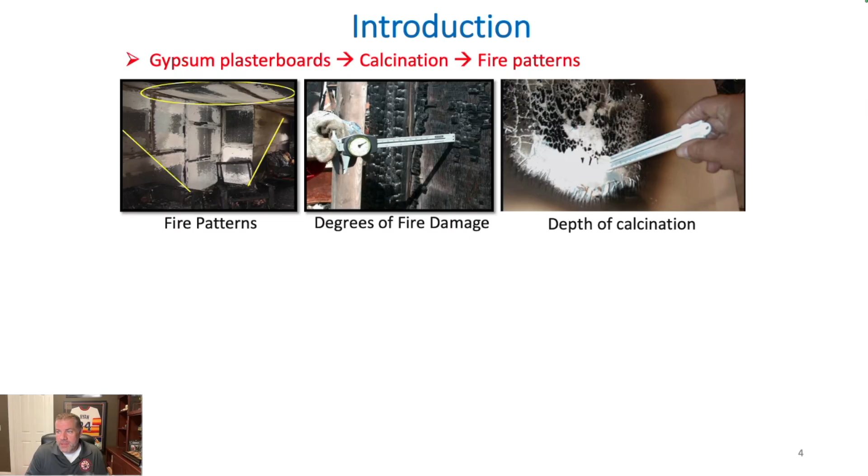But really what we were trying to tie together is: is there a way from the forensic side, the data that we gather through depth measurements, to tie that back into the fire dynamics? And the better we understand that, the better we'll understand the fire investigation. So it's a big cycle is kind of what we were focused on.

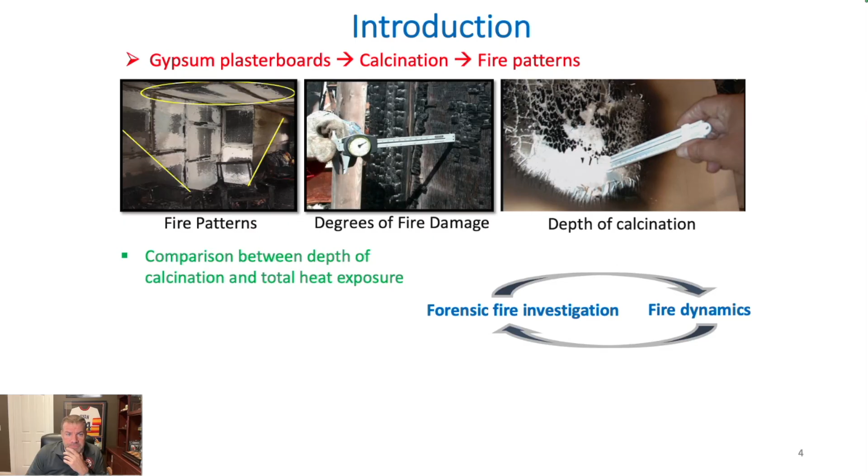The objectives basically, we want to analyze gypsum calcination, or drywall, the depth measurements in drywall, and then can we predict that? There's a lot of challenges with that. If you just assume it's regular drywall, just by itself, there's a lot of challenges because we don't know from a chemistry standpoint exactly how that dehydration front is going through the drywall.

So let me back up. So when I talk about drywall, gypsum wallboard, I assume it doesn't translate, but it's kind of the same words you guys use over there. It's a predominant lining material that we run into in the United States. I used AI for this, but it also said, and you guys can correct me, is Australia and New Zealand in that area, you guys use a lot of drywall as well for your lining materials?

We call it... I had a blank, but we've got a brand name. We call it a brand name rather than drywall. Plasterboard. Okay, so like Gyprock. Gyprock. Yeah, Gyprock, okay. Yeah. So there you go, plasterboard. Thank you.

So that's kind of the same stuff that we see in most of our structures over here. Now we'll get into, we have block walls and stuff and reinforced concrete, but a lot of our, especially residential, and a lot of our commercial structures will still have drywall. So we run into drywall a lot, or gyprock a lot, in our structure fires. So we wanted to kind of focus on that.

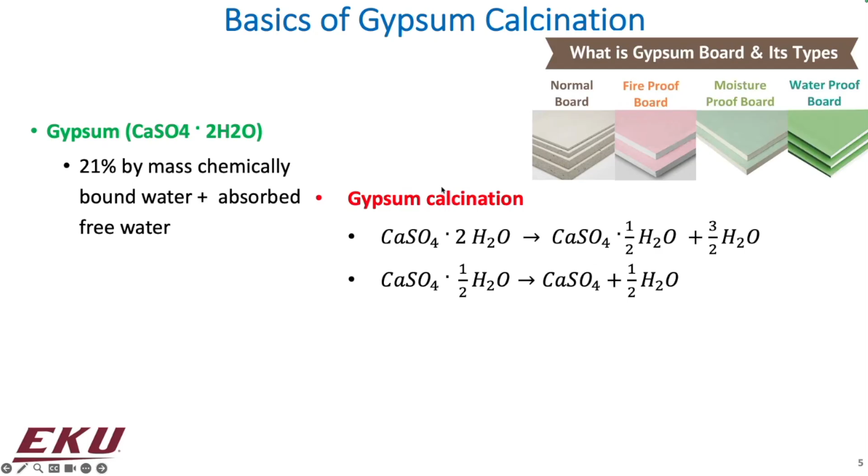So I'll get into the basics. We focused our initial investigation, so we'll call it phase one, on just your normal gypsum wallboard, not lightweight, not anything different, just kind of a homogeneous mixture of gypsum drywall that we would normally run into here in the States. And then the second half you'll see I'll talk about is basically the other side of that. So we looked at fireproof, water or moisture-proof board, sound resistant, those types of gypsum wallboard, and lightweight, where you have just basically pockets of air throughout.

And we wanted to see, first, just regular drywall, or gyprock, how's that affected? And then secondly, the last two years we've been focused on, well, can we see a similarity in these other types of drywall? So just to back up, gyprock is essentially 21% by mass chemically bound water. This is your normal gypsum wallboard. You also have some absorbed free water just from your humidity and moisture in the air anyway.

So the way gypsum calcination works is you have this calcium sulfate dihydrate, so that's where your chemically bound water comes in. As you heat it, you essentially have to chemically dehydrate the wallboard, or the gyprock, before you really start affecting the material itself. So we're going to look at some of the chemistry. That's about as deep as we'll go here.

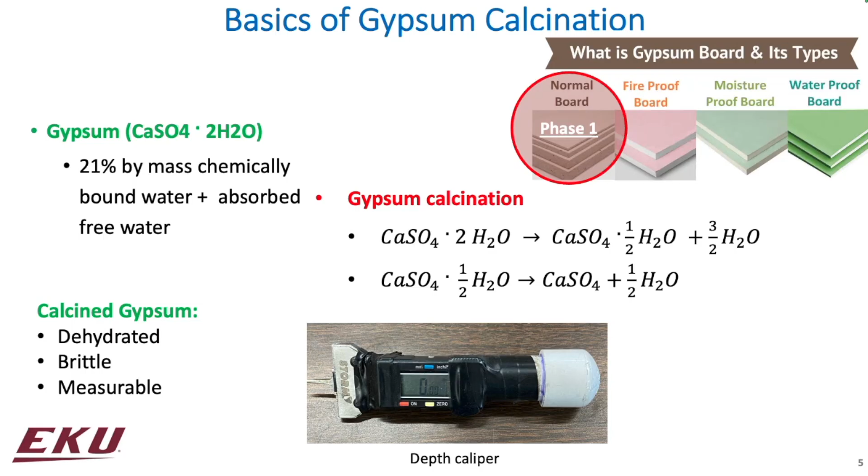As the fire's heating the wall, we're dehydrating it, and by that dehydration, we're leaving kind of this crumbly material behind, in which fire investigators, we can measure that. And what we're looking at is: is it reliable as a measurement for us?

So the original work, at least in the United States, was by a group. It was a husband-wife team. She was an electrical engineer, he was a fire investigator. And they were the first ones to kind of publish anything about this potential of being able to look at gyprock, and through the heating, can we measurably determine what's going on.

They initially did cross sections, so they would cut the board and then look for bands of different color. But it's hard enough to have fire investigators poke sticks into the wall. Trying to have them cut little sections of drywall throughout the whole scene isn't feasible, just from the time aspect alone.

So after the 1980s, they moved towards asking: can we insert a probe and get a depth measurement that gives us that similar context as what they were getting with the changes in color?

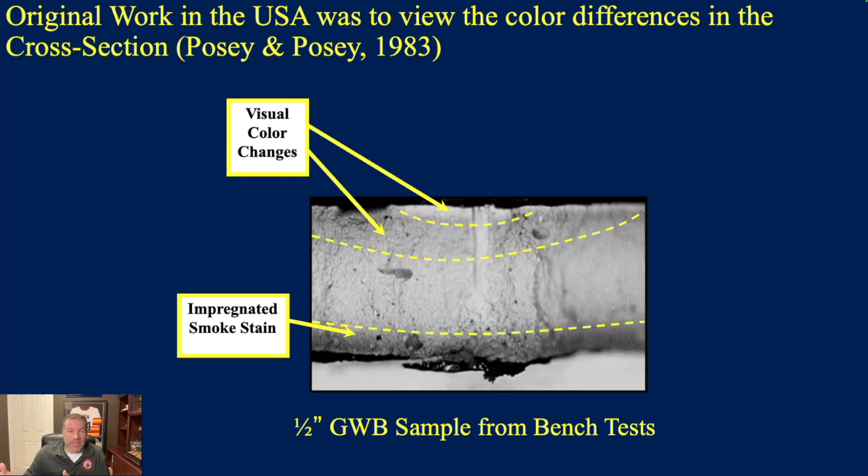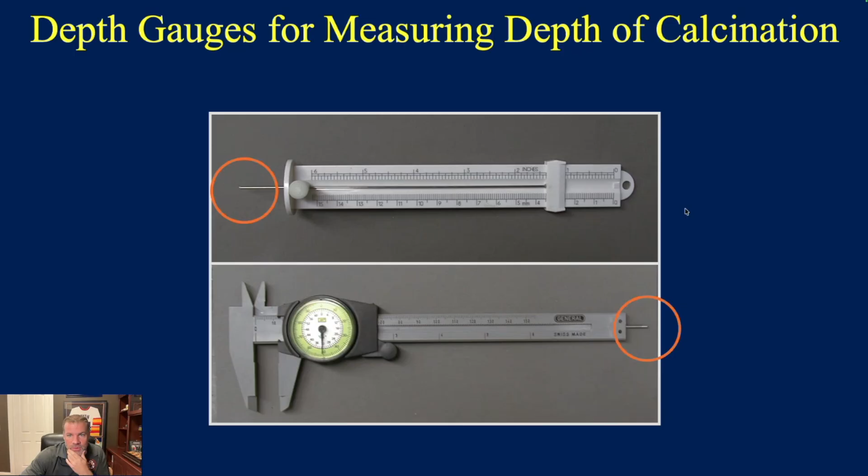We moved to this tool because we wanted more reliability. The original tool really depended on who was pressing and what kind of force was behind it. If you've got Bubba over here who can bench 400 pounds, is he pushing way harder than somebody else? So we tried to figure out if there was a better, reliable measuring device, and we came up with a whole bunch of them. You'll see a couple pictures later where nothing really worked.

We wanted a constant spring to take the user out of the pressure aspect of it. Jamie Novak, a fire marshal in Minnesota, came up with this idea. He basically takes a PVC tube, your digital probe—you can use tire probes or a general caliper—and then just a spring behind that.

I have this in a PDF document. Sadly, Jamie Novak has passed away, but he showed me how he built these a long time ago and was always okay with me sharing that, so I can share it with you guys. It's broken down picture by picture, and it's pretty simple construction, but the purpose was to keep this a reliable measurement regardless of who's doing it.

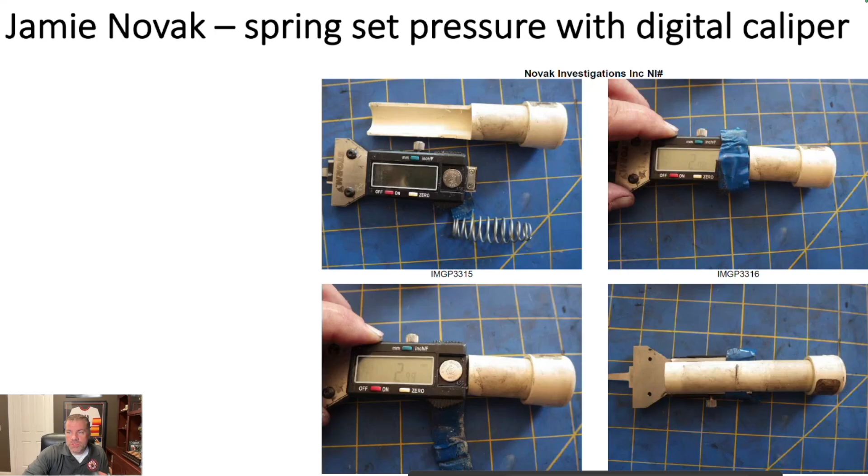From a fire investigation standpoint, this might be review for most of you, just how we do it here in the States. You're pressing into the drywall, either with the digital probe I just showed you or the original blunt probe, by hand.

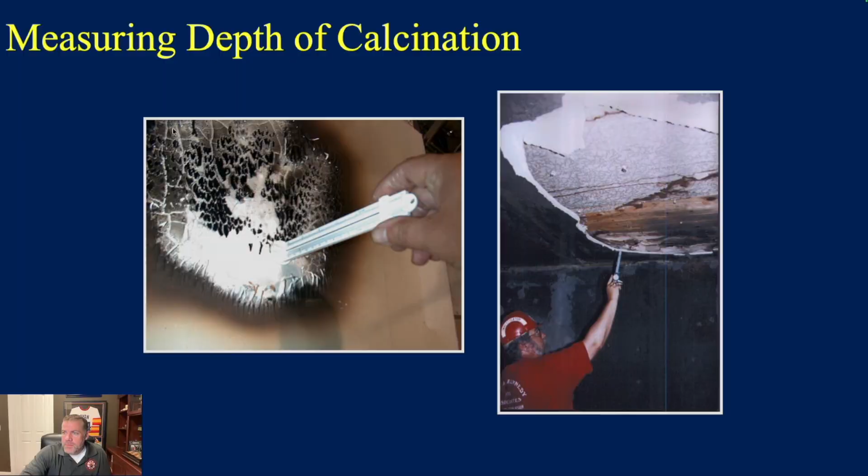We typically grid the walls so we have a uniform measurement system across the wall surface. We'll mark the score of the wall with some tool, then come through with chalk lines and pop them, which gives us a visible grid. We measure wherever those grid lines cross, but that's a pretty labor intensive process—just chalking that many lines takes some time.

So often, especially if I'm on a scene by myself without an extra set of hands, I'll just take the surveyor's tape, the pocket rods that pull all the way out to like 6.5 feet—I'm assuming you guys have that as well—hang those off the wall as my vertical grid, then lay a tape measure for my horizontal grid, and go foot by foot.

Nobody's done the true measurement study on whether we need a 6 inch by 6 inch grid or a foot by a foot one. How refined does that grid or mesh need to be? Nobody's done that work yet, but one foot by one foot, about 0.3 meter by 0.3 meter, has been adequate for what we've seen so far.

We establish a grid essentially just to make sure that we're measuring in similar locations throughout the space so we can have an idea of what's going on.

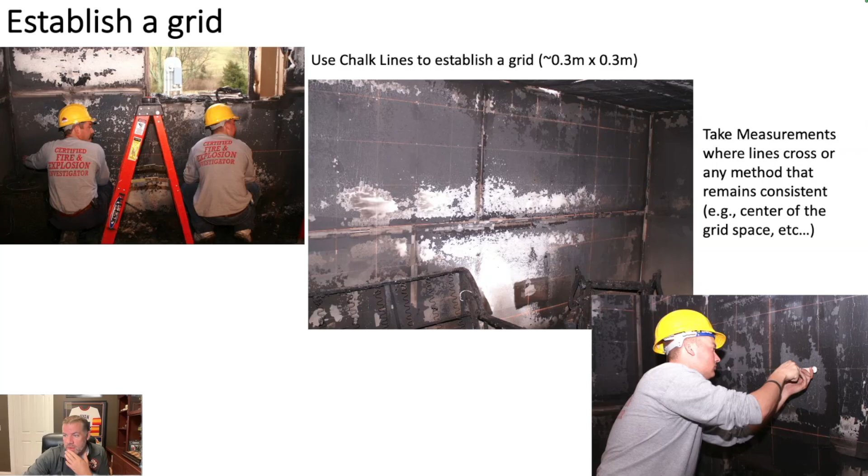Where we found depth of calcination being very helpful is if the whole wall is black or the whole wall is white, because we can't see from a visible standpoint any differences, but measurably there are some differences, and I think that's where fire investigations can really benefit from this.

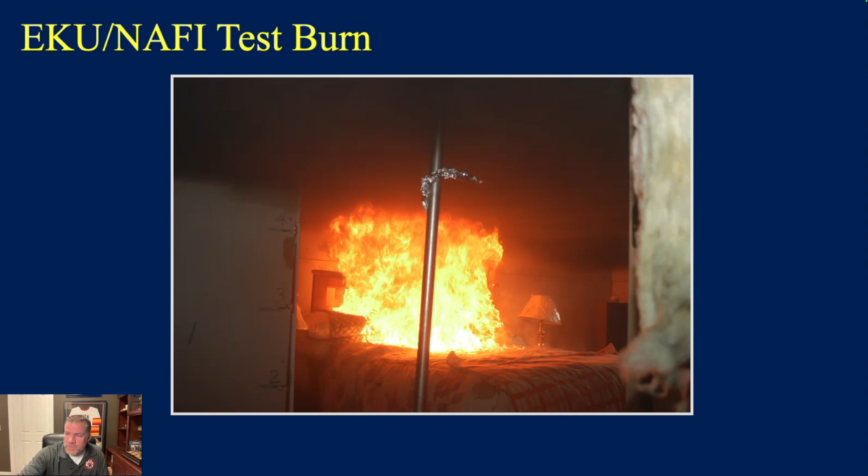So we've been doing tests. I've been doing fire tests ever before I got to EKU. So for the last 20 years, I've been involved in doing fire patterns tests, and this is one of our early on tests. We started the fire in the center of the bed, and then we were looking at the damage afterwards. Obviously, you have your clean burn, so it's pretty simple to see what's going on here.

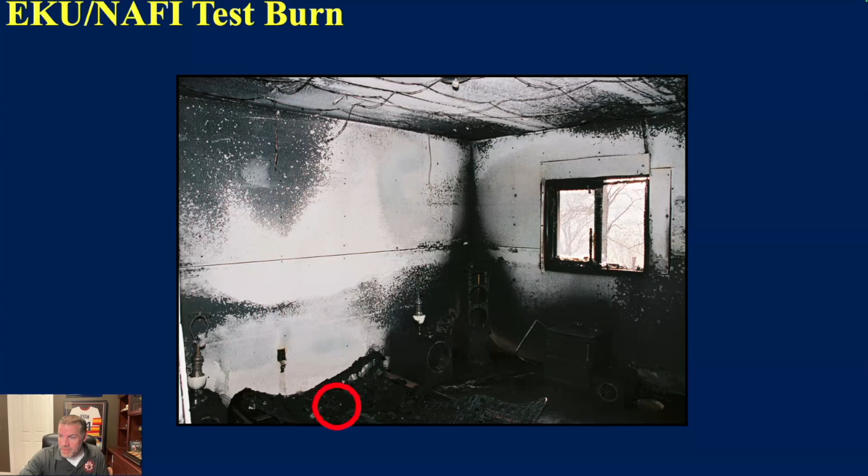But then what we did is we measured it, or we gridded it off, and then we measured it. And this is how we would, back in the day, display it for everybody else to follow along.

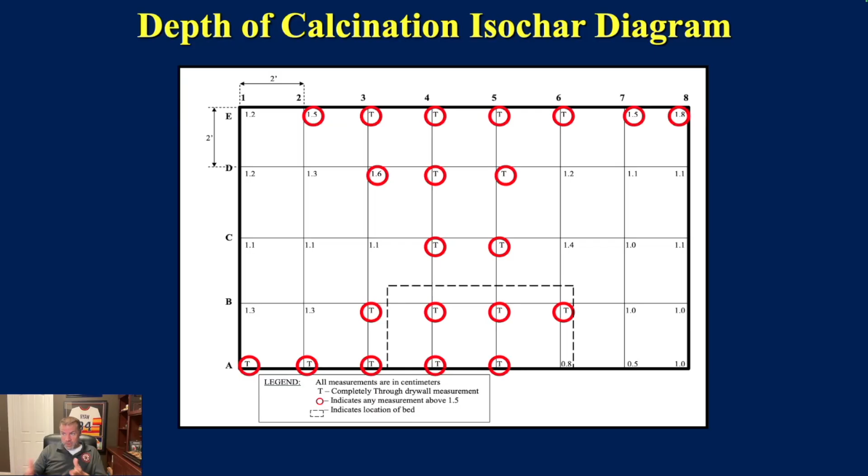Now, what I have been doing is using Excel, or I use MATLAB quite often because it's just a matrix of numbers, just to help give us a contour plot, which looks a little bit nicer. So I'll walk you through that here in a second.

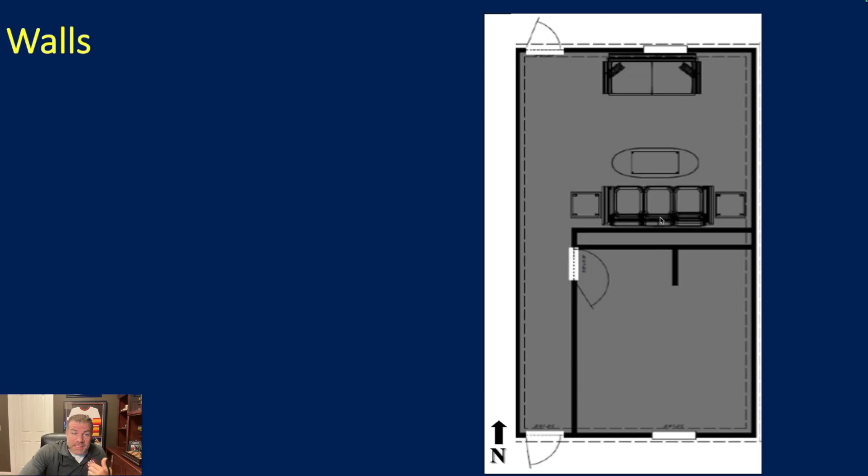But what I want to show you now is we did a series of tests. So we've been doing tests for a long time is what I'm getting at. And we've been taking depth measurements for a long time too.

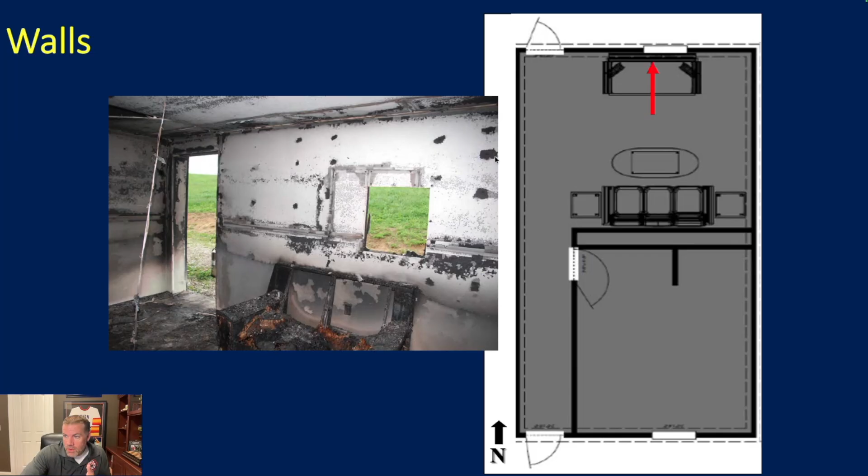So for instance, this would be to me an example of where doing depth measurements are helpful. We performed this fire test. We have a love seat underneath the window, and you have a door as ventilation. You can see the wall damage here. It's pretty much all high, right? Nothing surprising there, I don't think an origin's over there.

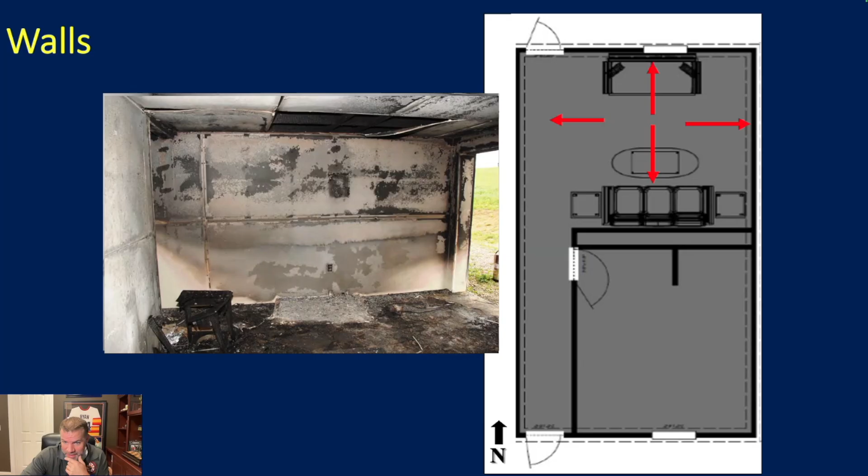But when we take the actual measurements and we display it—here, what I've done is they call that an exploded view diagram. So basically you've taken your two-dimensional floor plan and you just exploded your walls out, so they're laid down right now.

But these are elevation views. So here's your door, that's your outline of your door, and then here's your window, and then behind your love seat, you can see you have a protected area.

The brighter the color, the deeper the measurement in this contour plot. So if we go to the wall that was of interest to us, where we saw visibly where our couch was, there is the center of that wall that is a bright color. That's telling us high or deep measurements of depth of calcination here.

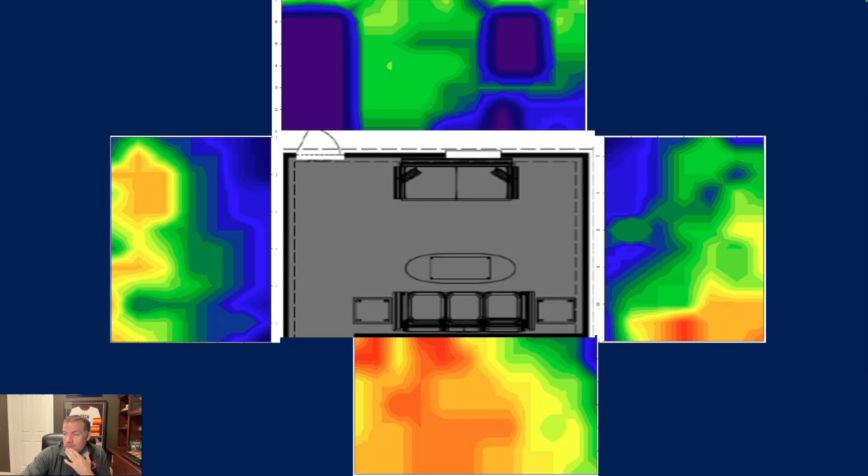But then there's something going on at that table. Now that is the actual origin. We actually started the fire underneath this end table, and it obviously transferred into the couch and consumed the couch. Now would that one little pocket of damage behind the table be enough for me as a fire investigator to say, aha, that's the origin? Probably not, but it would make me stop and question a little bit more compared to just looking at the visible damage alone. So that's the intent behind doing depth measurements—when we visibly can't see differences, measurable data does come into play on some of our scenes.

Here's one my students did. They basically took, I think this is Google SketchUp—when Google SketchUp was, I don't know if it's still free or not, but it was a 3D diagramming software—and they overlaid an Excel spreadsheet graph on it. That was a different way of showing depth measurements, and I thought that was an interesting way of displaying it. So there's different ways to display your depth measurements along the way that kind of help visualize for others what's going on.

Sorry, great question. Yeah, absolutely. Just that last room that you showed, not that one, the one before.

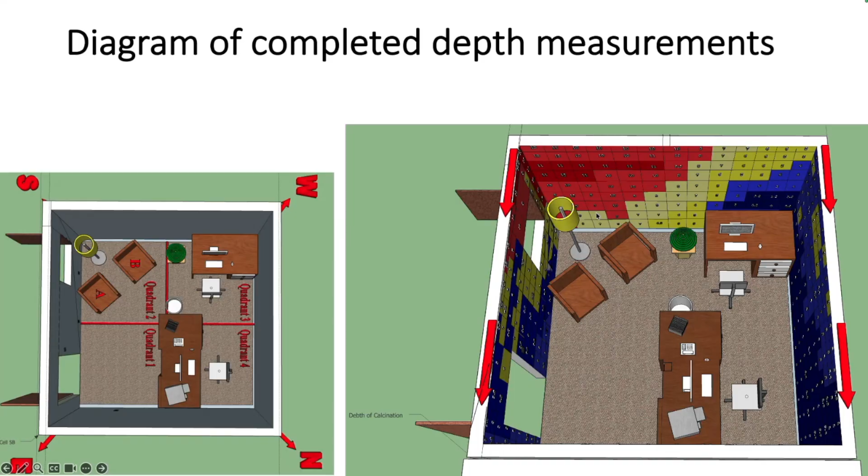How long post flashover did that fire burn for to produce those patterns? Yeah, that's a great question. So this one would have gone 2 minutes post flashover. Okay, great. Yep, so obviously the initial patterns are gone, and you've got that full calcination on all four walls.

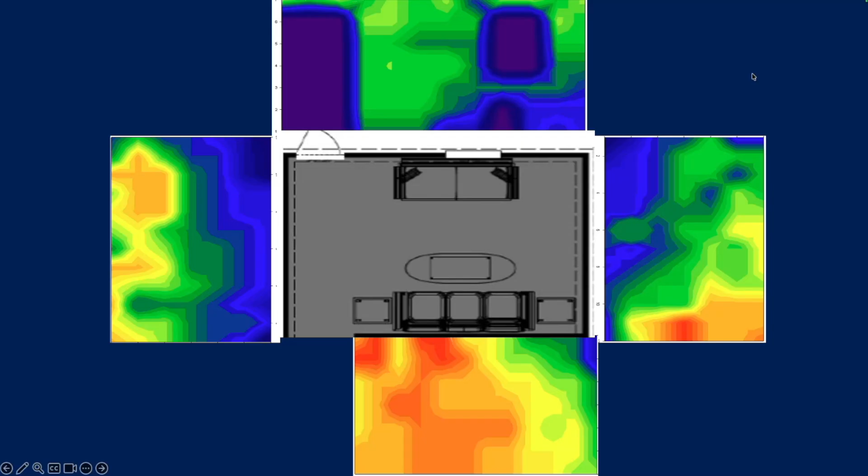One of my dissertation topics—and I'm going to bore you with that—was focused on how we better use fire dynamics in the context of interpreting fire patterns and how these patterns and damage are created. One of the things I found in the fire investigation profession is that we've never done a great job of asking: how do we all agree? Do we agree on varying damage initially? Because if we don't agree on the fundamental data, we're going to have real problems with the interpretation—we'll never agree on interpretation if we can't fundamentally agree on the data itself. So I did something silly that ended up getting published in the Journal of Forensic Sciences.

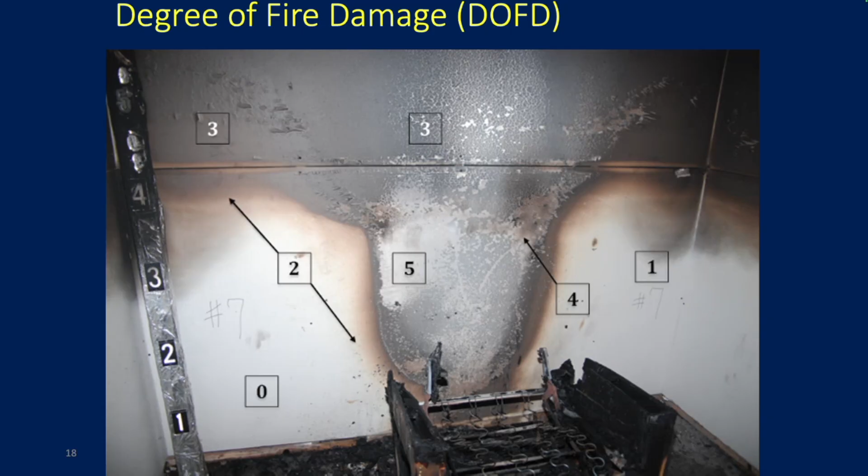I wanted to say, okay, what if we just number the damage? A 0 would be no damage at all—your clean gyprock. A 1, you're starting to get soot deposition. A 2, you're starting to char the paper. A 3, we're starting to peel, bubble, and flake that paper off. Your 4 and 5 get into burning off that paper, and then getting that clean appearance, which depending on the drywall or gyprock could be a white hue, or a color, blue, or pink—I've seen it just depends on the manufacturing process and materials they're using. So I went through and numerically assigned what most fire investigators are seeing in differences of damage, and came up with a degree of fire damage scale to say, okay, a 0 means this, and this is what it looks like.

So I provided this chart to a bunch of my students—fire investigation students who had training and experience. I gave them a grid, and I'll show you, it's a different wall than this one, but it's this wall here. It's a similar test fire to this, so the damage to that wall looked almost identical to this one. The only difference is the wall was painted orange instead of white. But the point is I gave them this, gridded it off, and told them, just on their own understanding of differences in damage, to identify each grid space based on the level of damage they think, using a number scale from 0 to 5.

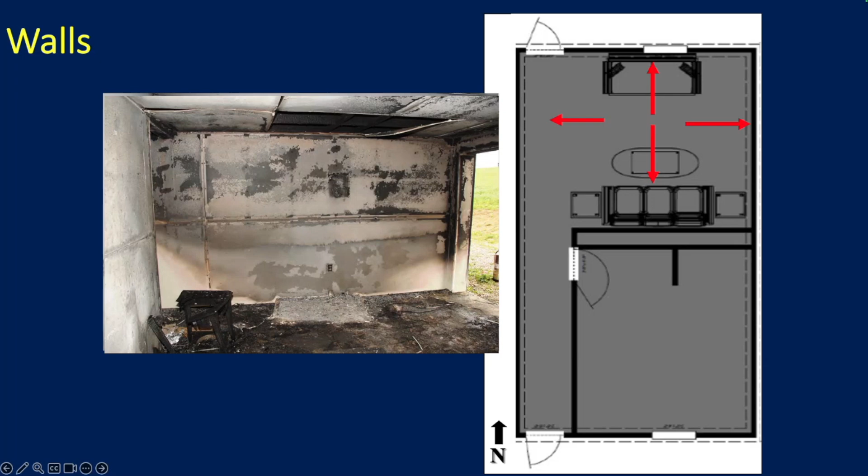And go. So they did it, and they were all over the place, right? Because the way one student defined a 1 or a 2 was completely different than the other student, which shouldn't be surprising when you don't give them a method. They use their own method, right?

And I think that's what happens a lot in fire investigation when we're looking at varying levels of damage. Some people say this is greater and this is lesser damage, but we don't have really any good definitions of what that is. So what I wanted to do is provide them a picture, and this is the numerical value. And I don't care if you use numbers or not. That was for my statistical analysis.

I was using numbers. But once I provided them this, I had them redo that same exercise, and lo and behold, all the answers started to collapse. So instead of each student having varied numbers, a lot of them started coming up with the same numerical value. And that's so simple, but that's actually really important for forensic sciences, is that we at least agree on the data.

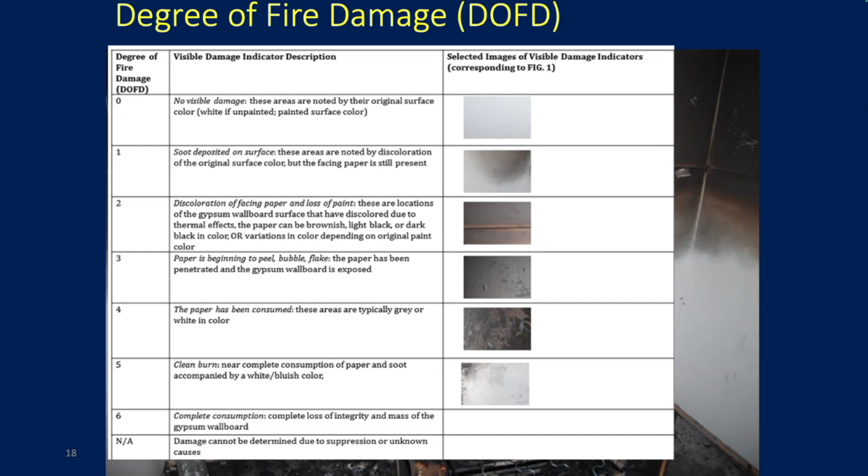So I do think there's something here. That was one of the directions I wanted to go with my dissertation, is how do we make this more objective? And that's kind of where we get into some of the depth measurements. Now, I don't like the terminology we use because it's too vague, like heavy damage, major damage, severe damage. We all use our own little terms. But the problem is you may say major damage and I see it as minor damage, whatever the difference is.

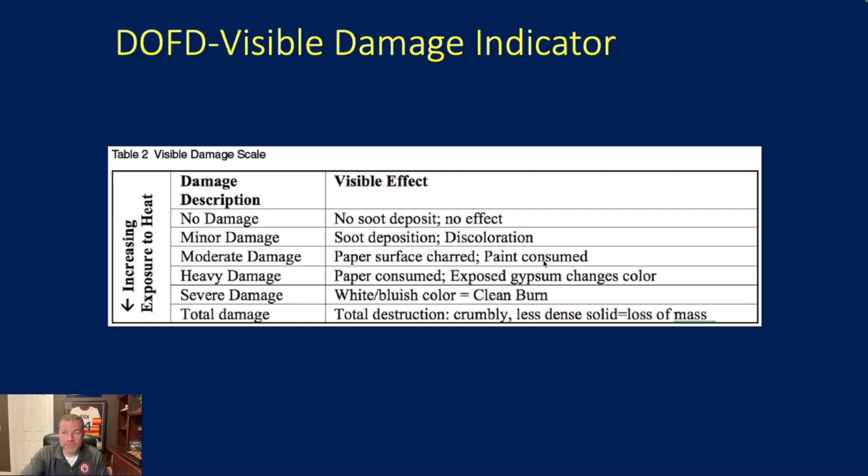But how can I, as an expert, come behind you, or an analyst come behind you, and agree that we fundamentally understand the same data? So if you like using the vague descriptions, which I'm okay with because I'm not a big fan of the number system I just provided, but if you define what it is you see, I think that's really helpful. So that's kind of what I was showing here, is you can use these terms, moderate damage, just define what you mean by moderate. So when you're writing your report, somebody behind you can say, okay, I get where they're coming from with moderate on this wall.

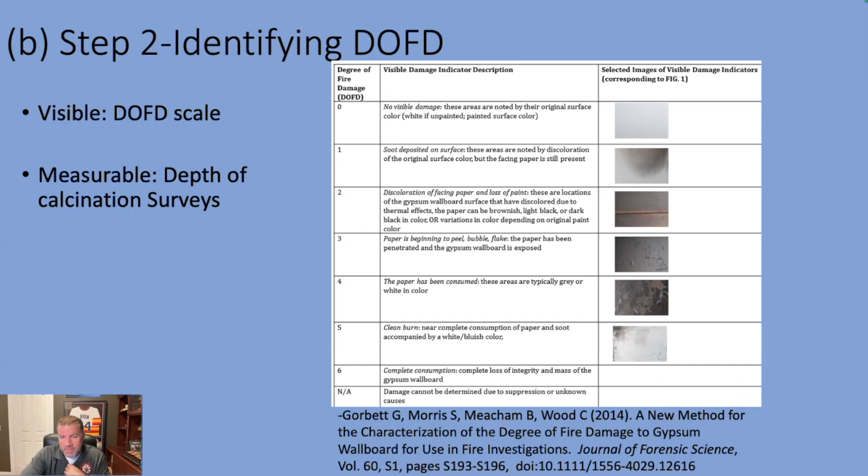So there's the publication, but that led into basically how do we use this varying level of damage as it relates to patterns. I'm going to jump over this stuff. And then where does the application come in?

So depth of calcination is one of the stronger processes that 921 talks about, because we've had a series of scientific research into the mechanics of depth of calcination. And then we've also had several over the years where they've looked at how do we apply this to the actual scene work. And I think that's what makes a solid process for a fire investigation, right? We have the science backing, and we also have the application that shows that it works and how we use it in our scenes. So that's one of the reasons we went this direction.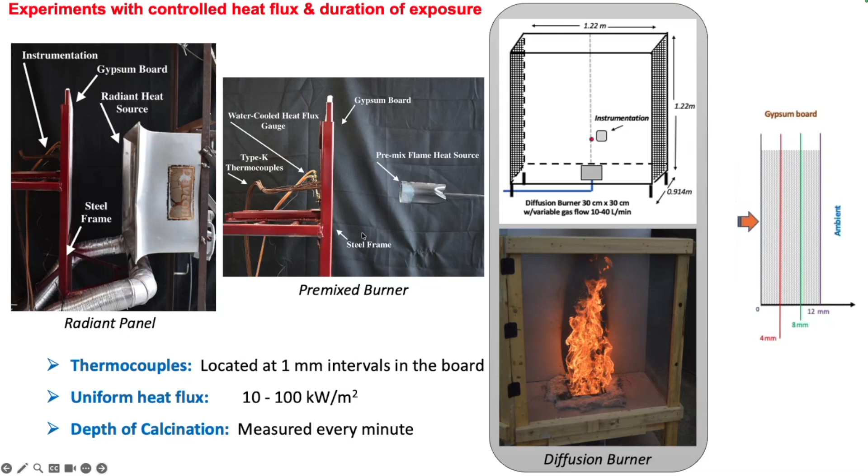We actually poked in our thermocouples for every millimeter. So we had one at the surface monitoring actual surface temperature, and then we had one every 1 millimeter into the depth. So we were able to track that dehydration front and that temperature profile throughout the thickness of the drywall, as well as get depth measurements during the actual exposure. We had to do what they call a thermogravimetric analysis, or a TGA, differential scanning calorimeter, or DSC, and then we also did your Fourier transform infrared spectroscopy.

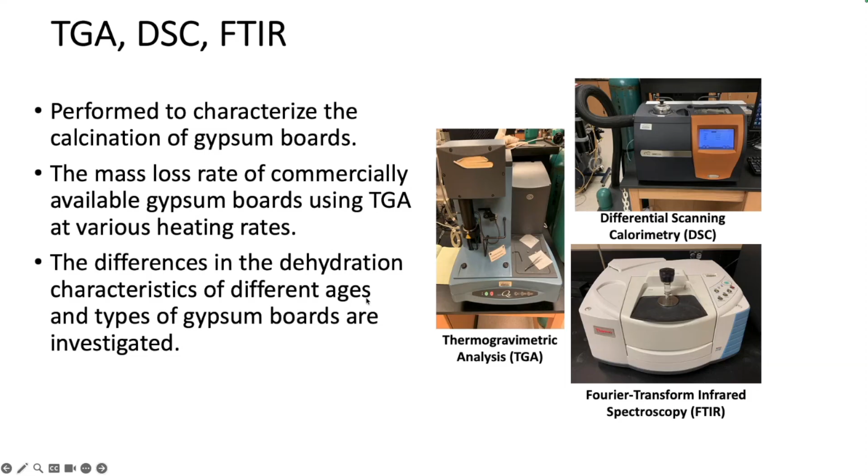We were looking a little deeper at the chemistry and different heating rates of the drywall. We would take sections after exposing them to heating and send those off to a different group at Georgia Southern. I don't know if you saw that university listed on the front slide, but we sent it to them. They would run this stuff and give us some understanding of the heating rates and what kind of dehydration each of these samples were given. Then they ran some of their own studies with standard heating rates to see the chemistry behind this dehydration front. That was basically to set up where we were going with our mathematical modeling.

Here, just as an example, I'm giving you some of the experimental results. We tracked the temperature - your high temperature here is at 0 millimeters, that's at the face where it's being exposed to the heat. Then every millimeter internally in the drywall is being tracked with temperature. On the right, we're showing you that contour plot of the temperature difference throughout.

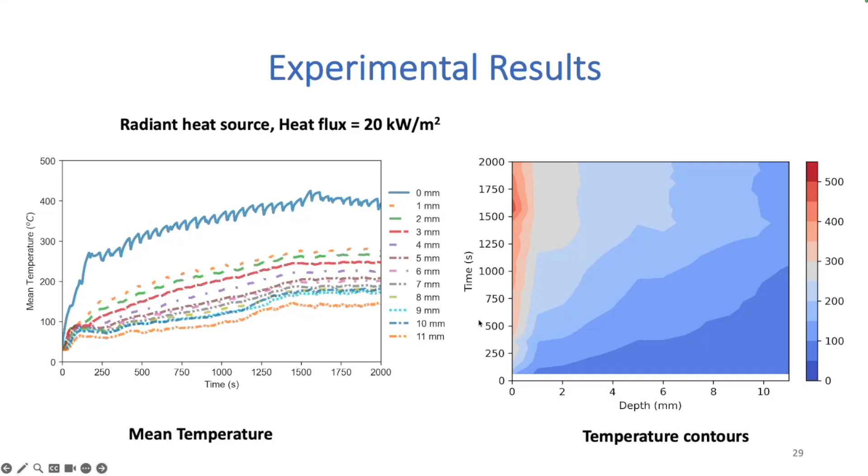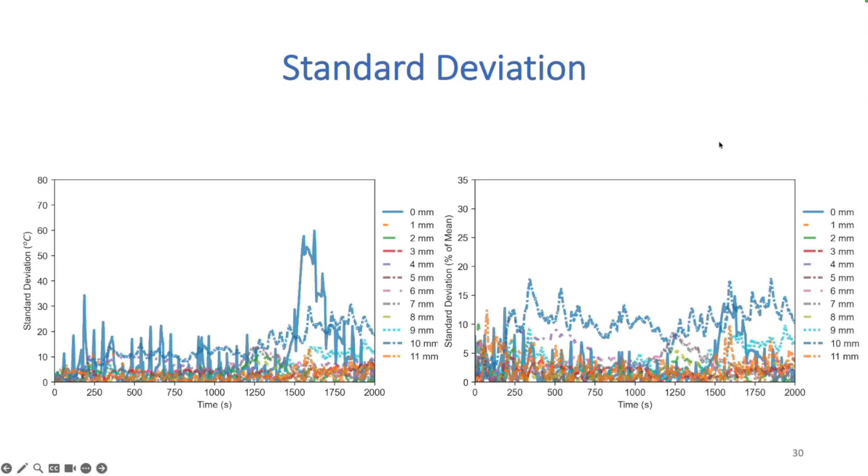This is our standard deviation. It's not horrible, but experimentally it falls within what we would normally find for most experiments with fire. In fire protection engineering, we're happy if we're plus or minus 30%. So this is not overly bad on our standard deviation.

What we're looking at here is the temperature of the dehydration front. So what we found is - I went into this whole series of experiments thinking fire patterns are essentially the history of heat flux, so I thought the higher the heat flux, the greater the damage. That's true, but not true. And that's kind of what this is showing you. You have to reach a certain temperature before you really start influencing that dehydration front and ultimately what we're measuring. If you don't reach that critical temperature threshold, then you're never going to see a dehydration front go through the drywall, which makes total sense.

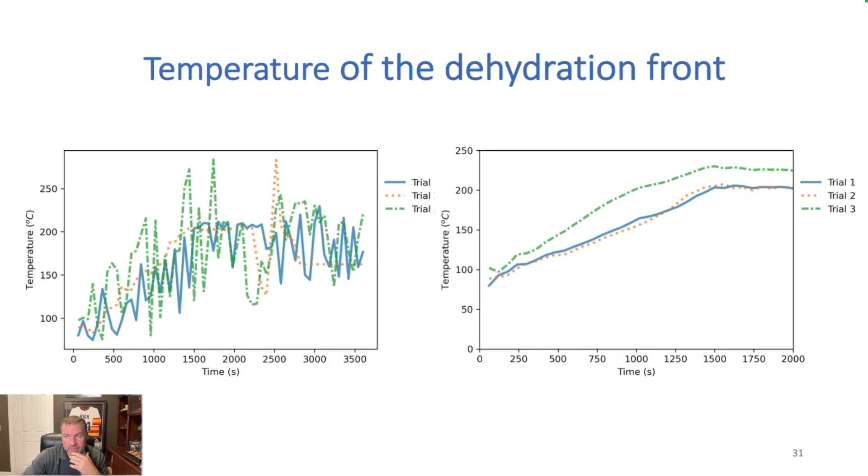If it's 1 kilowatt per meter squared and you expose it for 24 hours, that's not going to dehydrate the drywall because you're not reaching the temperatures to drive the water out. So that makes total sense, and that's kind of what we're seeing here. Once we hit that threshold, whatever that heat flux is, then we are seeing that heat flux history play a role. But you have to, at a minimum, hit a certain temperature for that threshold to take off.

And so where the TGA results, we saw it's not a linear graph. So there is something that happens throughout the drywall, and it makes sense, right? You start heating up that water, then you have to essentially evaporate that water, but now you have this moisture that's going to play a role in moving through the drywall. So there is a difference. Once you drive out a lot of that water, then your temperature is going to do some interesting stuff, kind of plateau out and keep going. So that's kind of what we're seeing here - you've got to push that whole dehydration, that water out, and then you're going to really start affecting the gyp rock.

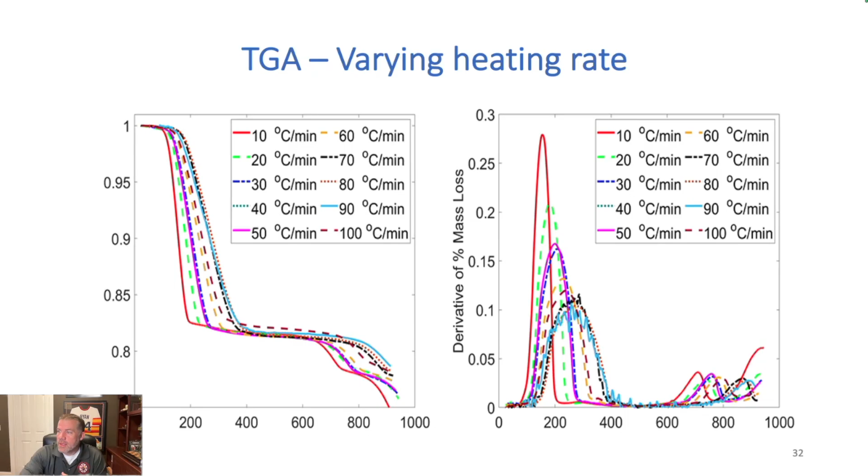From a mathematical perspective, what we were really focused on is this species and momentum conservation. And I know everybody who just looked at this screen is done listening, but we'll get through this if you're not into math and chemistry. What we're trying to do is get this data on heating rates and understanding what's going on from the chemistry standpoint, and then mathematically applying that so we can have some valid prediction methods.

So we're looking at the species conservation, where we're looking at that water dehydration front through the momentum of that, and then obviously it comes back to the energy conservation as well. But a big focus of ours was this value here - that's really your vapor production rate. Like, how fast is that happening, and how fast are we moving that moisture out of the drywall?

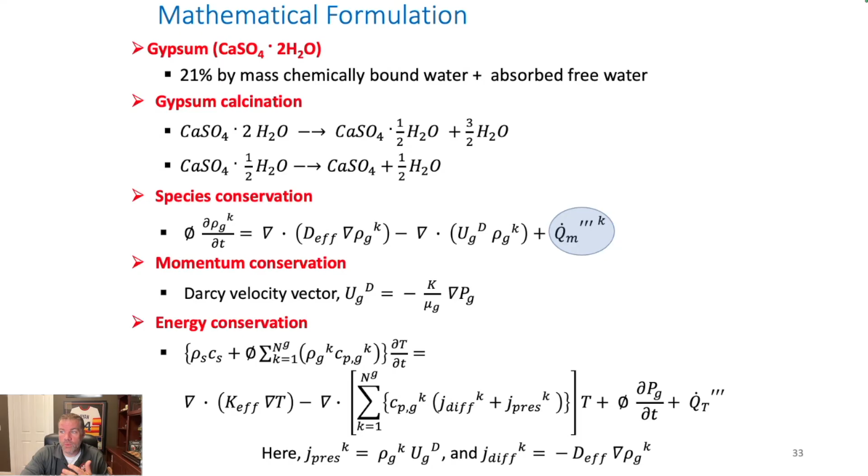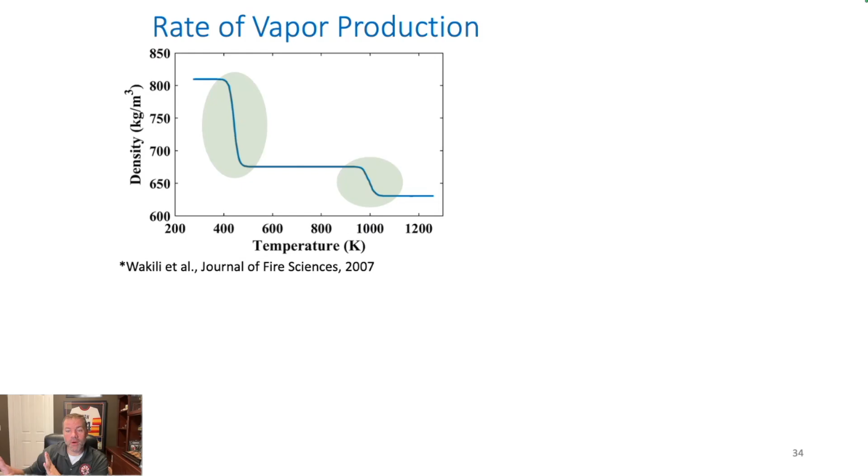That's going to slow down or speed up this whole depth of calcination aspect. So you have these two points where you're pumping in a lot of energy and not changing a lot, and then you plateau and then you go through it again, which makes sense from the physics we were talking about earlier. You're exposing this drywall, you've got to dehydrate it, and then you're pushing that water essentially out of the drywall, and then you're affecting the gyprock. So that's kind of what we found in previous literature, and we found the same thing in our experimental work.

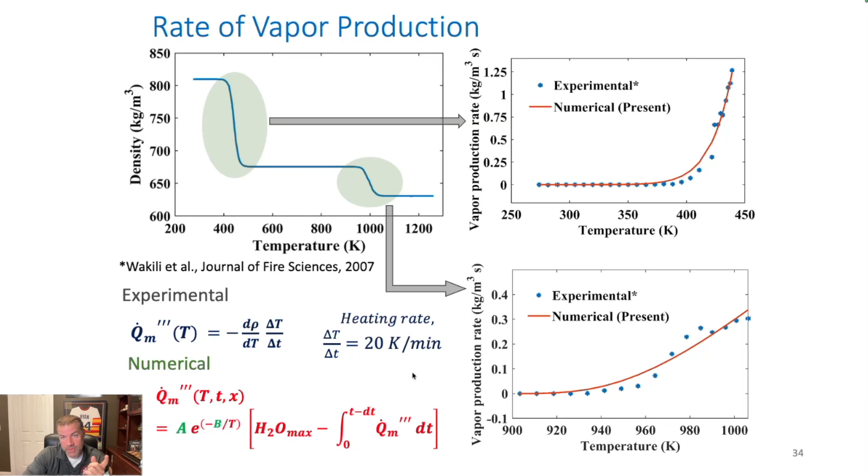What's of interest is we wanted to match our experimental results to the numerical results. So we're really checking and tracking this numerical aspect because that's the prediction side, so can we better predict? We wanted to show whether the experimental matches our numerical predictions. As you can tell here, the stars are our experimental data, and that red line is our numerical prediction. So we're accurately predicting, based on the chemistry we now understand, what we'd expect from a prediction standpoint numerically.

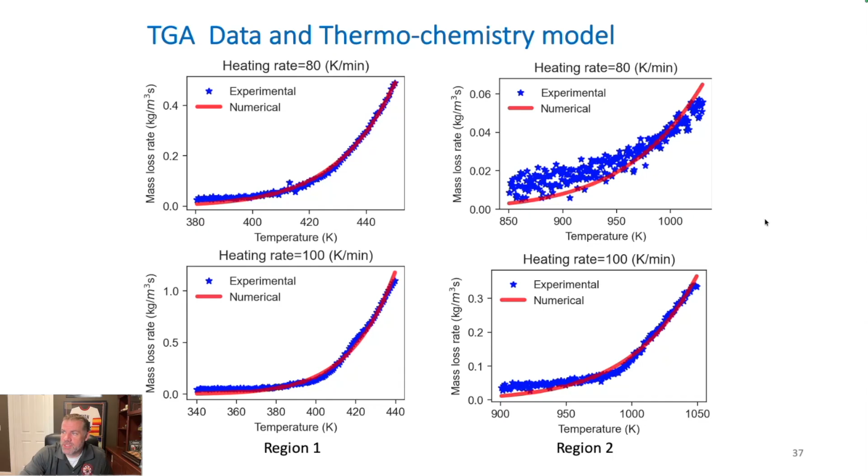And there's a little bit more of that data, sorry, I jumped over those. We're showing you different heating rates. So the faster you heat it, the faster that numerical prediction is going to be, which makes sense. So we really focused on that vapor production rate, that Q dot M, with the lowercase m, and that helped us go into our numerical methods.

Now, the gentleman who's on this with me, his name is Dr. Shijin Kajamal. He is from India, and he's one of the smartest numerical guys I've ever met. He's the brains behind this. I understand it vaguely, but no, he's the focus.

So we did a couple things here. We applied this mathematical prediction model and looked at it from an experimental standpoint, checking to make sure our numerical prediction is matching what we're finding experimentally.

Then what we had to figure out is that heat transfer goes in 3 dimensions. It's going to go in X, Y, and Z as you're heating through this drywall. It's not just one direction. But 3-dimensional modeling is really difficult because it takes a ton of computing power, so we did some 3D modeling to see if we have to model this as a 3-dimensional problem, or if the 1-dimensional approach is acceptable. What we found is that the 1-dimensional approach is acceptable for heating of the drywall.

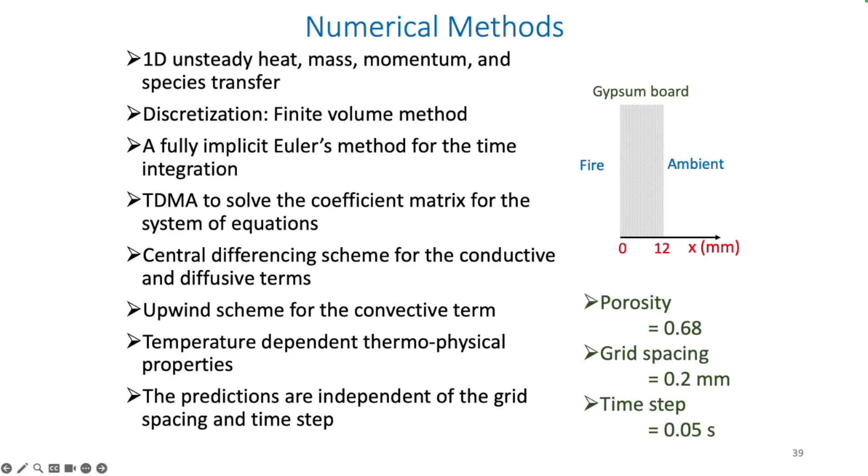We have a question online for you regarding the moisture. From Grant: is there a bias in which direction the moisture is driven, and does framing have an influence on the loss of moisture and calcination? Good question, and that's what we were looking at here.

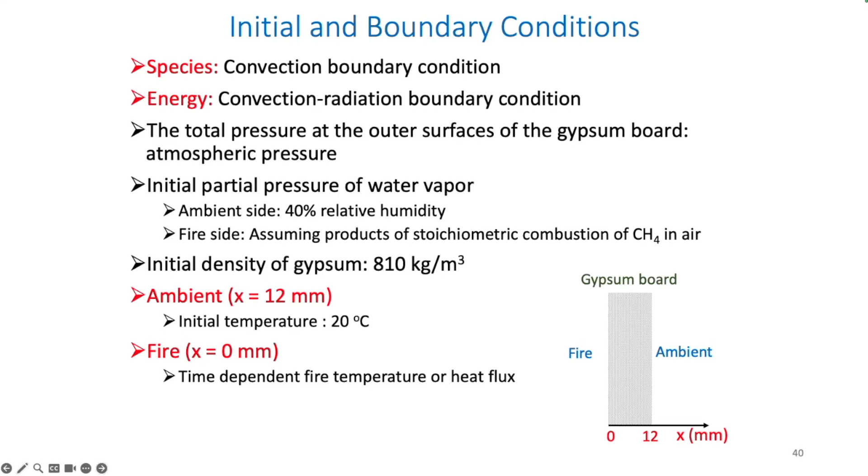We wanted to know if there's a substantial amount going in the other two directions that we'd have to account for in our mathematical prediction. What we're finding is that when we model it as 1-dimensional heat transfer, it's adequately predicting that dehydration front. So yes, in the general physics, you are correct, it is going to go in all 3 dimensions. It's going to go out the front as it's heating, push through the rear, and go through the actual board itself. So from a physics standpoint, that does happen. But what we found from our experimental and numerical connection is that if we just focus on what's being pushed out from the 1 direction, it's adequately predicting that dehydration front. But you are correct, it would be all 3 dimensions.

So then we went into that validation aspect. This is just a bunch of graphs that might bore you, but the takeaway is we have a numerical prediction and we're comparing that to our experimental data. The weird figure here: your stars, X's, triangles, circles, those are your experimental data, and the same color but solid or dashed lines represent what we're seeing numerically.

And here's 90 kilowatts per meter squared. So now this is flame up against your surface exposure. And so we would expect flame against your actual exposure to be harder to predict because that's a lot of heat, and there's a lot going on, and it's fast.

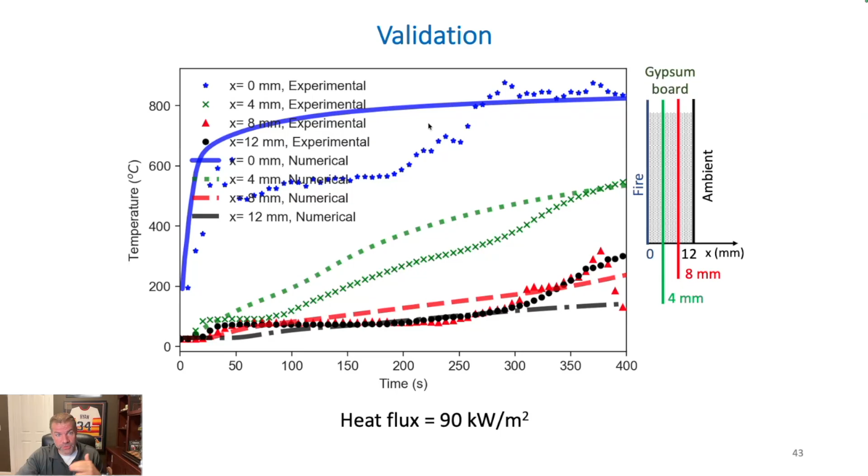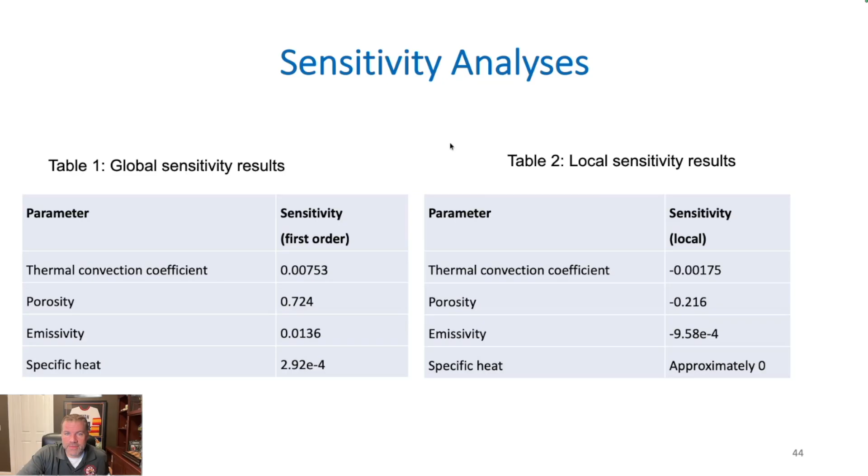So our numerical is still matching the general trends, which is good. We did a whole sensitivity analysis. If you want to get into the math on how we came up with stuff, I can provide that to you, but I'm not going to bore you guys on the presentation.

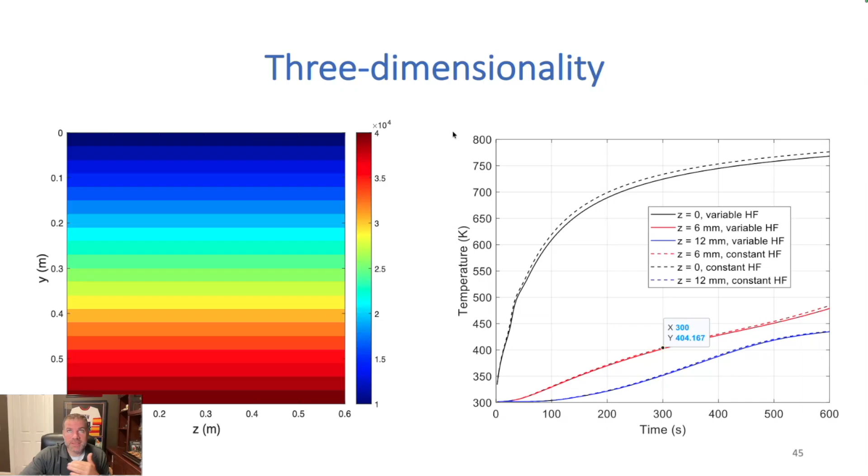And then this is where we looked at three-dimensional. So we are able to model three-dimensionally, and you can see that we can adequately see what's going on. But again, the computing power and just the time it takes to do this is pretty substantial. But it isn't considerably better than the one-dimensional approach that we were doing.

And then we moved into correlation. So a correlation, as I always have to teach my students, hopefully this isn't mansplaining, you guys can yell at me later if it is, but experimental correlation is essentially you're taking that experimental data and then putting an equation to the best fit line curve or exponential curve. And then that curve is what we can apply.

One of the big takeaways is, when you get into that 50 plus kilowatts per meter squared all the way up to 100 kilowatts per meter squared, we can tell you that if you're 8, 9, 10 millimeters or more in depth, you saw a high heat flux. So you probably had a flame against that wall at some point in time. Now, that doesn't tell you that's the origin. It just tells you that you had flaming combustion up against that drywall at some point in time during the duration of the fire.

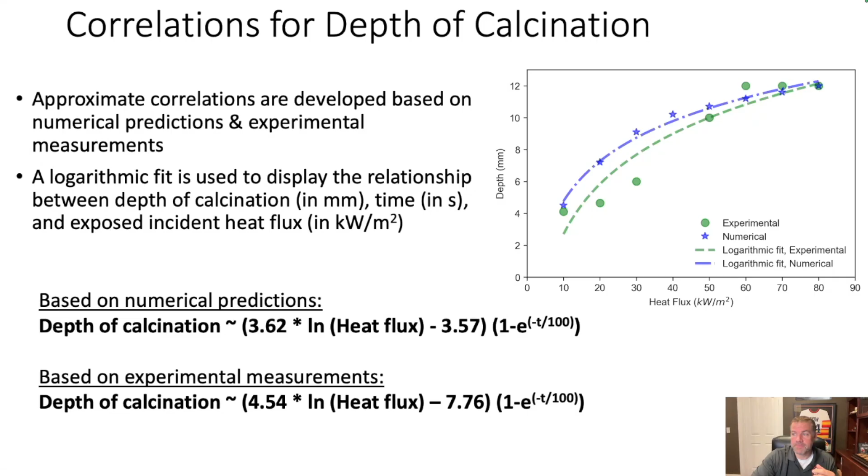We then wanted to connect that to, if we have these measurements, can we put this in actual computer modeling? And so we feel yes, this is a direction we can go, which from a fire investigation standpoint, this is FDS. We use FDS, and we just did heat flux boundaries on the wall surfaces, and then we compared that to our depth measurements that we did on a full-scale burn. And then we did our numerical and experimental correlations to show what we would have predicted based on the values we're seeing there. And you can see that the trend is very similar.

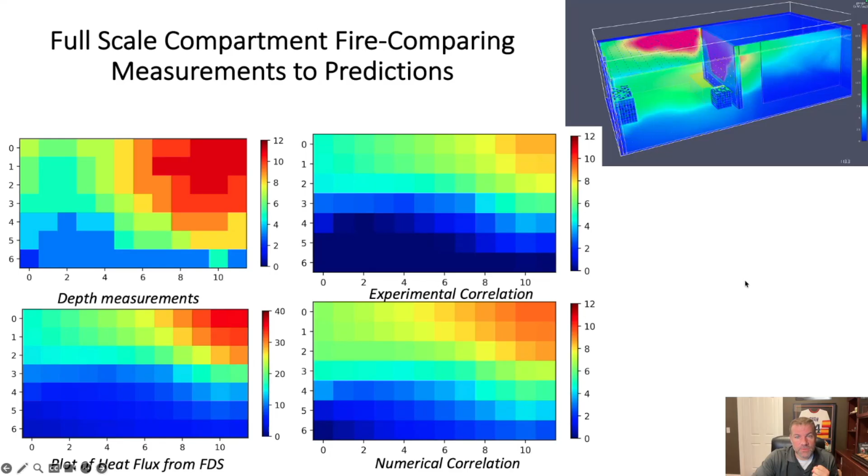And from a fire investigator standpoint, that's the most important thing. Yes, we do care it's plus or minus whatever from a scientist and researcher standpoint, but from a practical standpoint, are we getting the similar trends? And why that's helpful to us is that we think in the future, we're not there yet, but in the future we might be able to model with these heat transfer boundaries and test different origin hypotheses based on depth measurements that we found on the scene. So that's kind of a direction I think some of this data can go. So that's the first stage of research.

Sorry, go ahead. Just to jump in again, another question from Jim Monday online: Is this time dependent? Does 50 kilowatts per meter squared heat flux for N minutes give the same depth as 100 kilowatts per meter squared for 2 minutes?

Great question. That was when we went into this, that was my thinking, that was my hypothesis when we went into all this research. And what we found is that's kind of true, but not always true. You can't have a low heat flux that you expose for 2 hours and have it give you the same thing as a high heat flux, say 50 kilowatts per meter squared for 2 or 5 minutes.

That's not going to equate unless that threshold for temperature is met. So if you're not having high enough temperature to dehydrate the water, then you'll never get the drywall calcinating, where you're actually able to get depth measurements of any sufficient value. But when you get to that high of a heat flux, yes, then it will be somewhat dependent on duration. And so you'll see that kind of with our correlations, that time does play a role in this a little bit, but not as much as I initially thought for your lower heat fluxes.

Great question. So the second phase of research, we focused basically on all the other types of drywall. We did different paint layers, and we did on just general normal gyprock. Then we also did your fireproof, your waterproof or moisture proof, your soundproof, a bunch of different drywalls.

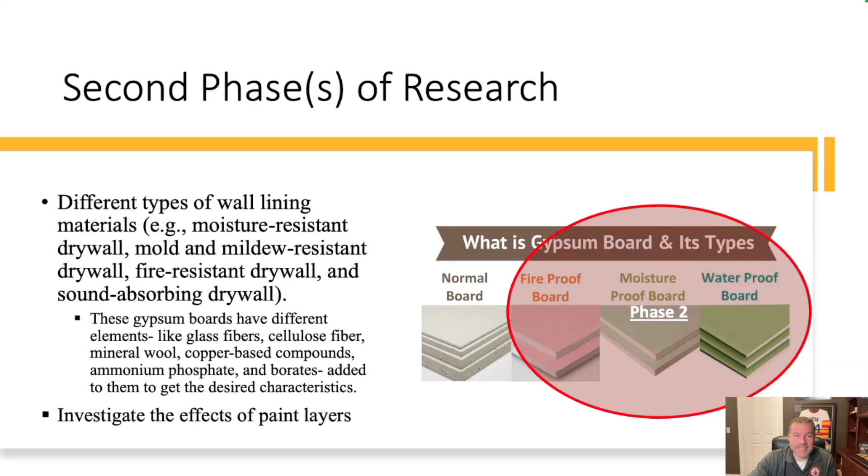The interesting thing about the drywall, where they have all this different branding and names, essentially what they're doing is adding additives or adding a lot of fiberglass materials into it. So we kind of went into this guessing, our hypothesis was that's going to affect our depth measurements. And, long and the short of it is it does. So we are struggling to come up with solid correlations on these boards, but we think there is something there. It's not as easy as just your normal gyprock.

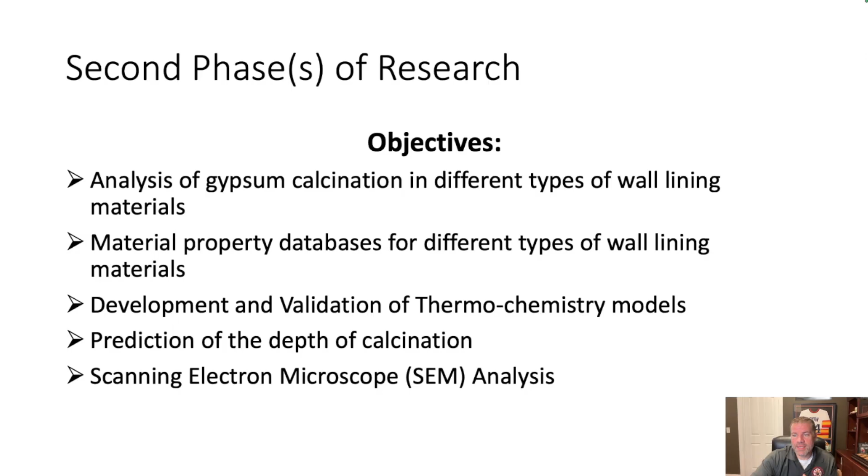And so, again, the objectives of the second phase was to take these different types of gypsum material for different types of lining materials. So I'm assuming you guys also run into something similar there, where you use like moisture resistant and soundproof and those types of drywall or gyprock as well. So we tested that. And we also did scanning electron microscope analysis, an SEM analysis, to see - because if it's a dehydration front, are we visibly able to see that there was dehydration? So that was one thing we added to this research as well. I'll give you highlights on that.

But basically, we have a lot more deviation, right? It bounces all over the place compared to what we were seeing - we had much nicer, from a research standpoint, smoother curves, and our prediction was much closer. When we actually sit here and do all these different types of drywall, we're finding that it's going to bounce a lot more. And that is very dependent on all the fiberglass reinforcing a lot of this material. So that's affecting our depth probe measurements. It's not as effective as your normal drywall.

There is something there, but you really have to understand the various additives. So you got your glass fiber, your metal alloys, what amount of this material is in the drywall, and then how that affects your depth probe measurements is not completely understood, and we are working on better understanding that. It's not a heat transfer issue - there's not enough material in there to really affect the heat transfer. So we're still getting that dehydration front, and all the math that we did on the chemistry side, that's still working. The problem, though, is when we're taking our measurements, we're hitting these metal alloys, these fiberglass reinforced additives, and that's affecting our depth measurements. So there's something there, but we haven't quite figured it out exactly yet.

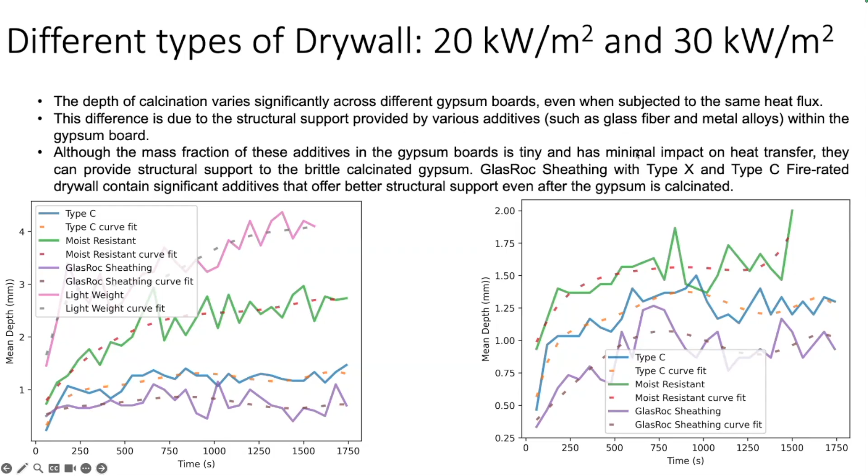From the online guys: wallpaper in older homes, did you find any correlation for complicating your depth measurements there?

So we didn't do wallpaper, but I have seen a recent study - it's not published yet, it might be coming out - where somebody did use wallpaper, and what they found is it didn't really drastically affect depth measurements, but it does affect the visible pattern, because you have the flame spread on the front. Your visible pattern could be substantially different than a non-wallpaper surface, but your depth measurements were still matching up, which to me is a better sales pitch for why we should do measurable testing, especially when we have wallpaper - because the visible might be from your flame spread across the paper, not necessarily the actual heat exposure. So the heat exposure could still be tracked by measurable data. I think that paper is probably going to be published. It was from another set of researchers, so I don't know all the details, but from what I saw in their research so far, that's the direction they're going with some of that.

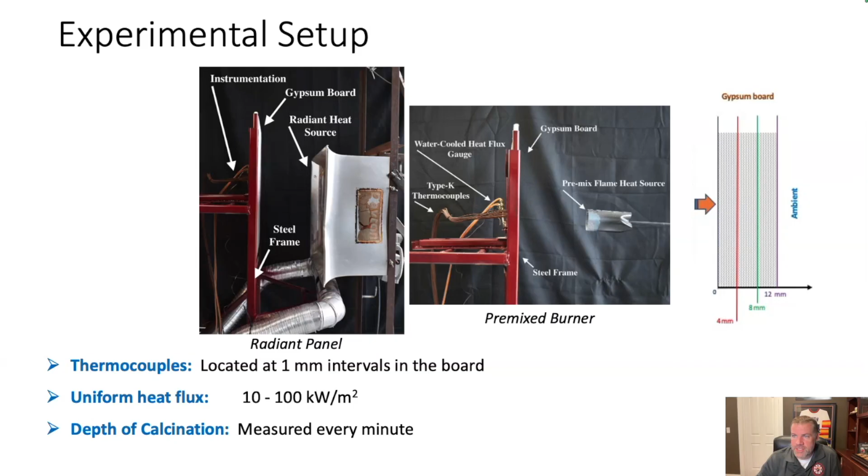So our experimental setup was very similar - I don't have to go through that again. We exposed it. The only thing we did differently here is we didn't do a diffusion burner. The diffusion burner is all over the place, so we had a lot of discrepancy in heating, which is expected, but that's also what we're going to find in the real world - that's why we wanted to do that study. But now in our second set, we chose just to focus on constant heat fluxes.

So I think there is some value here. We didn't do enough work to get there yet, but we're planting the seed, and hopefully somebody else can pick up this ball and run with it for future research. But there is something here.

The other thing that we did, and we're still working towards this, is again my focus is objective. How can we be more objective in what we see? I think artificial intelligence, especially when it relates to digital image analysis, is a direction fire investigation can benefit from. There's a lot of things it can help us with, one of which is how do we identify lines of demarcation?

Because oftentimes we get on a scene and a fire investigator is talking about 'well, I see this,' and another one saying 'well, I see this.' And I'm not saying either of them are wrong. It's just, how do we have a system where we all see essentially the same larger lines of demarcation? We're never going to take interpretation out from the individual person, but how can we better identify the similar stuff?

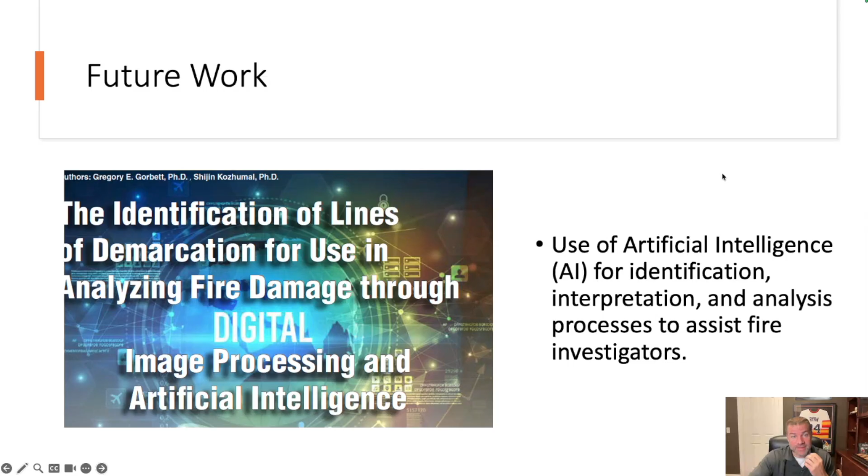So we applied this. We published this article, in the International Association of Arson Investigators, Fire and Arson Investigator. This is a few years ago now. What we did is we used digital image analysis, just your normal tools that are out there, to see if it could identify lines of demarcation.

The image we're using is just a single recliner, one of those overstuffed polyurethane foam chairs. We burned it up against a wall surface, and then we're seeing if digital image analysis can pull out the larger lines of demarcation.

There's a bunch of different tools that are currently available that do this, not just lines of demarcation for patterns, but where they're able to identify the larger changes or gradients in color and texture. There's a variety of different tools out there, and this is how a lot of your picture software works—if you use your phone or a camera or Adobe or anything like that, it gives you options to modify your image, smooth it, or increase the quality of different items.

These are the tools that they're using, so it's just a mathematical tool. If you think of a picture, a digital image, it's got an X and a Y axis, and then your pixel value. So you've got your X axis, your Y axis, and then your picture is just a bunch of pixel values, 0 to 255, or however you have this set up if that's a color image.

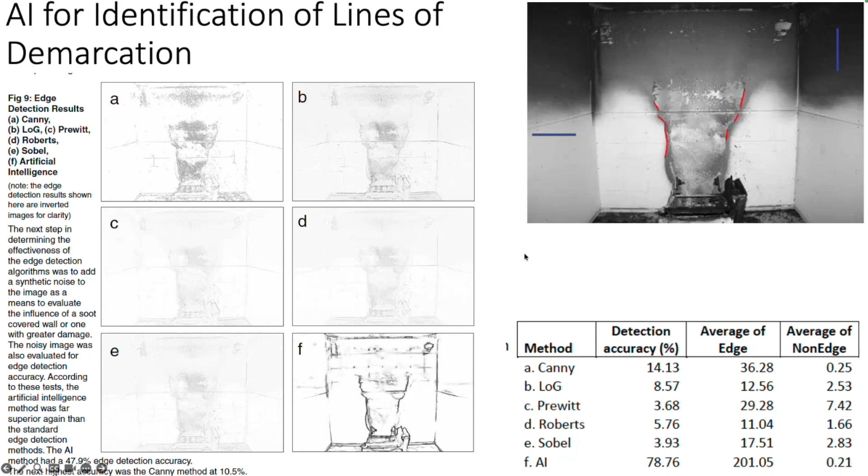Let's see, stop sharing. All right, sorry, I wasn't able to see the chat button because my screens were all taken over. But if you guys have any questions, if anyone's got any questions, just raise your hand and then we can do it one by one.

I've got a question for you regarding the program that you do at Eastern Kentucky University there. How long has it been running for now? So the degree program started in 1973. Oh, that long ago. Yeah, and the investigation program started, I would say, 15 years later, so in the 80s is when the actual investigation degree started. But in '73 we started. We have 3 different degrees, the engineering technology - for those who want to go out and design systems, that's kind of how we started.

About the fire investigation one - yeah, so that would have been in the 80s, mid 80s. Okay, and what about the current students? Have they gone out into the world? How many students? Oh yeah, they're everywhere. We have an online and on-campus degree now in the investigation program. The online requires residency, so students come in for 2 different 7-day weeks, usually in the summer. We've had several students from UAE, Belgium, Germany - a lot of international students, which is really cool because we get everybody in one room. You've got people from the States, people from international, and everybody's learning from each other, and that's a lot of fun. So we've been doing the online program for about 10, 12 years now, but the original degree was in the 80s.